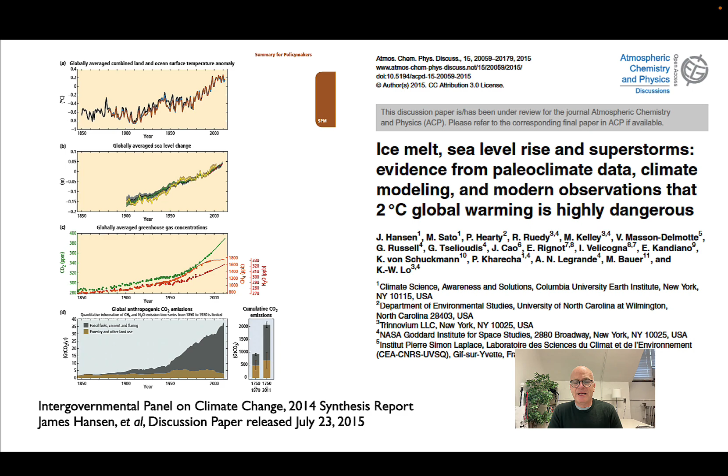This is a problem that has been noted not just by climate scientists, but increasingly by businesses and governments as well. To me, maybe the most notable moment was in the mid-2010s, when insurance industries began realizing that their business models were going to change drastically with the onset of climate change, that they were paying out more and more for these large-scale climate disasters. And in fact, there is this fight between insurance companies and energy companies over what really needs to be done and how urgent that is.

Today, I think there's broad agreement that this is a problem that needs to be addressed in all sectors, but construction is one of the largest contributors to global carbon dioxide emissions, has been for years, and therefore we have a particular responsibility, but also a particular opportunity to make a really big impact in solving this species level problem. Building operations, energizing our buildings, heating and cooling them and lighting them, takes up nearly a third of carbon emissions, 27%.

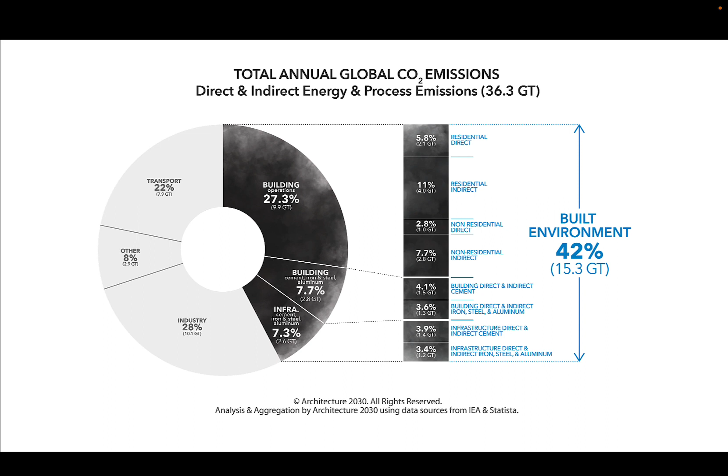And when you add the embodied energy, the embodied carbon that goes into constructing buildings from cement, iron, steel, and aluminum, but also from building the infrastructure necessary to make buildings go, what you find is that the built environment contributes about 42% of carbon dioxide emissions to the planet. And therefore, we have the biggest share of the problem, the biggest responsibility for the problem. But if we change the way that we work, we also potentially have the biggest impact on it.

The good news out of this is that we have a variety of new tools that seem like they're going to maybe give us some leverage in actually addressing these problems. About 10 years ago, in 2013, the AIA commissioned the consulting firm McKinsey to look at what technologies were likely to be the most disruptive by 2025. We're now on the doorstep of 2025, so we can look at this and assess exactly how well McKinsey did. But the idea was to think about what tools we'd have in our toolbox as architects, but also as builders, as engineers, that would change the profession, that would change or disrupt the way we build buildings.

And McKinsey thought that most importantly was probably mobile internet. I would say that some of that has certainly come true. We are more used to working on our phones or on iPads, on job sites, in remote locations than we ever have been. Whether that's been the biggest disruptor or not, though, I think is up for grabs. And it's worth looking at some of these other technologies and thinking about how they've changed the way that we practice, the way that we build.

Probably the most impactful, and one that McKinsey recognized would be one of the most impactful, was the automation of what we do, handing over a lot of the sort of drudgery work, if you like, of designing and constructing buildings to digital technologies. This idea goes back 50 or 60 years to the very, very early days of cybernetics. Doug Engelbart, who was one of the pioneering thinkers of cybernetics, picked architecture as one of the professions that would potentially benefit, or at least be changed the most, by the advent of digital technologies.

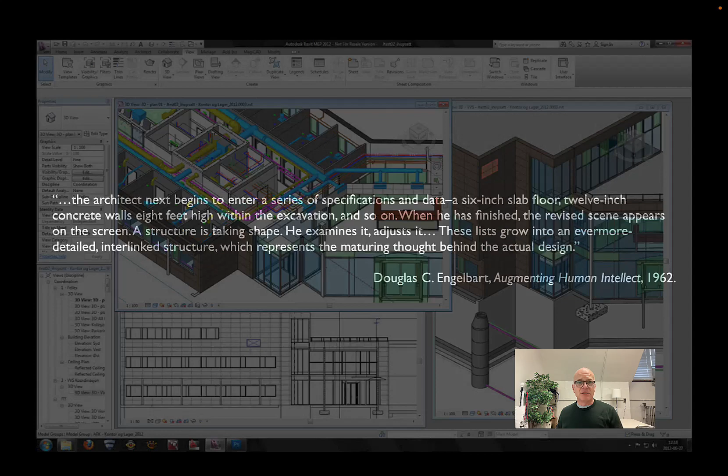And interestingly, he understands that those elements are all connected. They're all lists that can be referenced to one another to give us basically a three-dimensional spreadsheet of what we're building. And I would argue that this has come largely true, that when we work with Revit or another building information modeling technology, we're essentially working in a large spreadsheet with a graphic interface.

BIM, Autodesk, Revit, and similar programs allow us to not only see what the end result is going to be, they allow us to coordinate things like systems and structures, and in practice allow us to keep track of those. It lets us take off quantities much more easily and lets us model the building in multiple ways. So we can do cost takeoffs, but we can also model the structural behavior or look for conflicts between services, things like that.

This has been a profound change just in the last 25 years. It has eliminated an awful lot of the checking work, a lot of the clerical work that went along with practice, even as late as the 1990s.

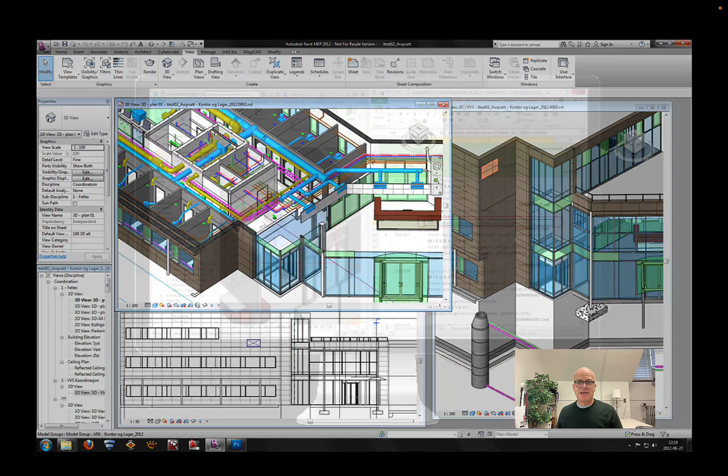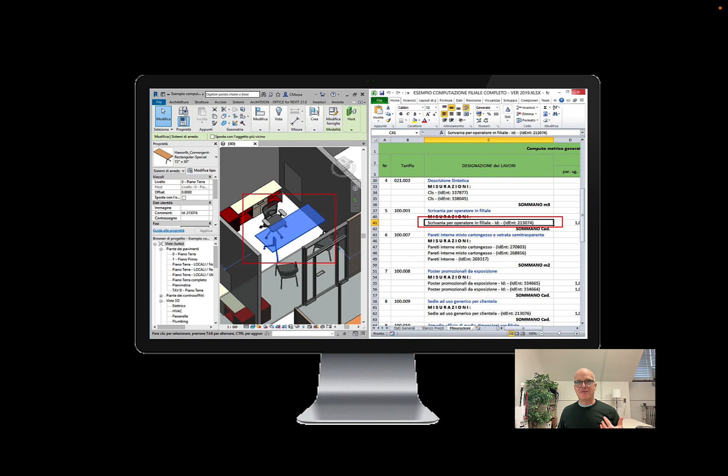And of course, this has spread to all sorts of other subdisciplines. We can select furniture, we can see if the furniture fits, we can place the order for furniture, we can get a spreadsheet of all the furniture that's going into the building, right out of the box on our desks. That has streamlined an awful lot of what we do as designers. It's given us a lot more time that in general we've tended to give right back to the clients. We've become a more efficient profession, but that efficiency largely has benefited the clients we serve rather than transforming the way that we work.

This idea has been speculated on by a lot of folks, notably Randy Deutsch, a colleague here at the University of Illinois, who in discussing the data-driven basis of design going forward in 2015 talked with a partner at LMN Architects in Seattle who foresaw architects becoming what he called data hackers, thinking about the building as a big set of code and being able to get into the code of the building and actually transform not just what it is we build, but also how we build it.

What do we mean by that? Well, I think one of the first examples you can see of this is the parametric design that went into some fairly early high-tech projects around the turn of the millennium. The so-called Gherkin, the Swiss Re Tower by Foster and Partners, built between 1999 and 2003, did this. It essentially turned the building into a set of geometric codes and allowed the designers to adjust the geometry net of the building to find the most efficient set of floor plates.

This is also used to model the building in aerodynamic simulations. You can see from the graphics that this is clearly 25-year-old digital technology, but it really was one of the first instances I can find of the code of the building, in this case the diagrid geometry that basically governed all of the structure, all of the cladding, but also all of the floor plates, the code of the building really being manipulated by designers.

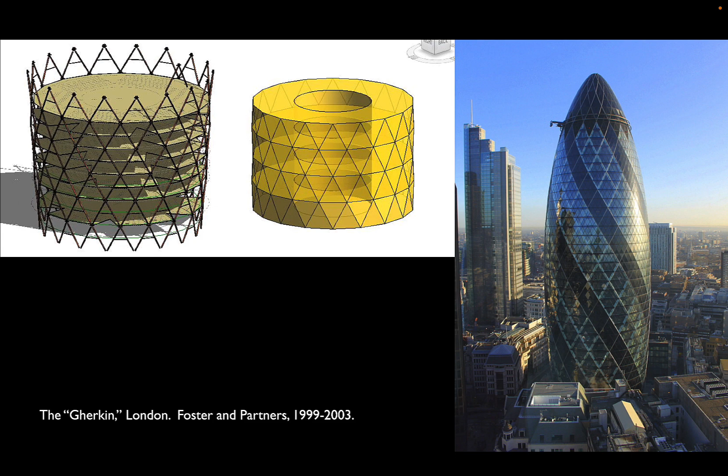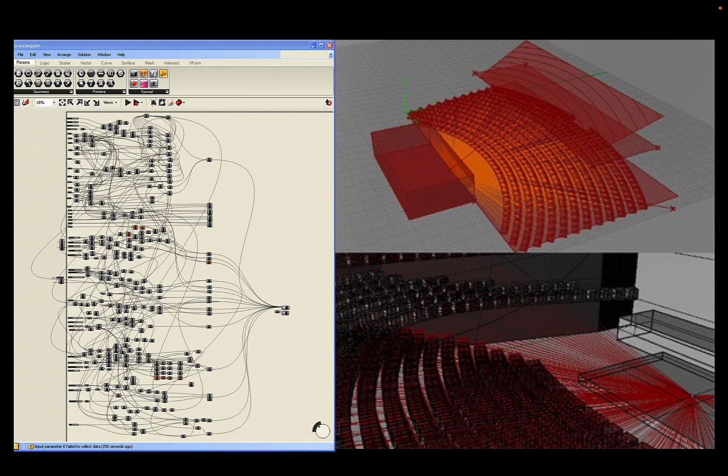Taking the building and understanding how to hack the data that goes into it to create a design tool. That ability very quickly trickled down to the point where this is a student project using Grasshopper from 10 years ago, where you can see that sight lines and acoustic lines are all being played around with by what Sam Miller would have called the DNA of the building. Shaping the space, running simulations on it and looking to see what comes back, being able to very quickly manipulate the code on the left to change the form of the auditorium on the right.

This has often been incorporated with more feedback. So Kieran Timberlake were pioneers in thinking about ways to both wire buildings for data collection and then to turn around and use that data collection to think about how to better adapt the building to its climate.

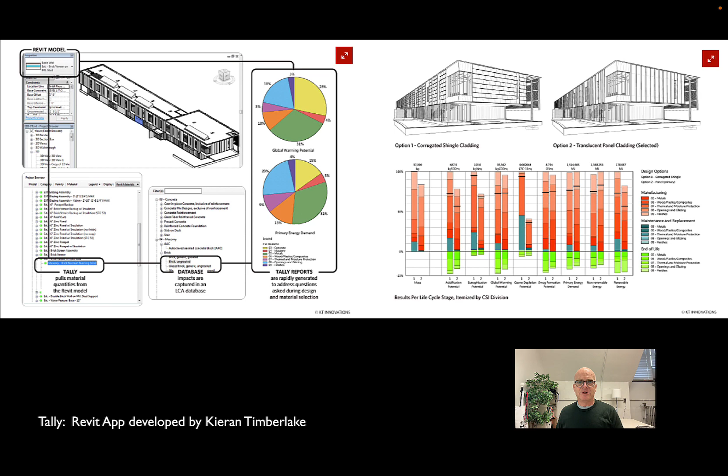So this is an app that Kieran Timberlake designed for Revit, designed to take the building's performance, to measure how warm things are, how cool things are, how air is moving through the building, and to think about how to better manipulate the cladding of the building to relate to its environment.

This can happen on a more sophisticated scale too. We get data-driven design that lets us see what the impact of solar gain is on building structures. Covetool was one of the early examples of this, and also very desktop-based computational fluid dynamics.

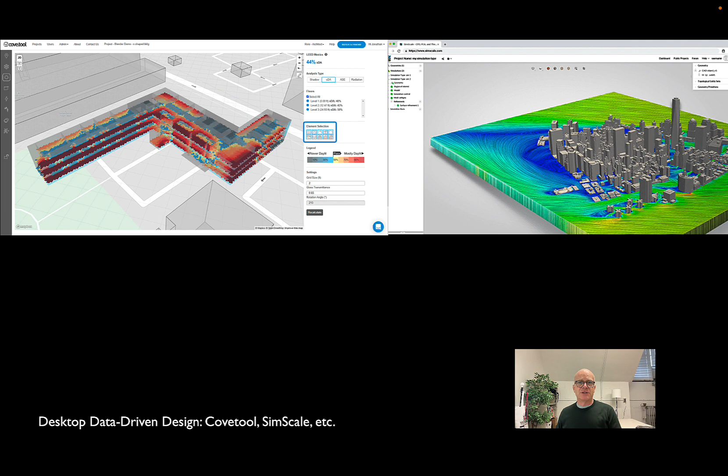One of the most complicated of the sort of 80s and 90s digital applications very quickly in the 2000s became something that was desktop-based, letting us see not only what the sun can do, but also what the prevailing winds would do, and the various effects of wind and rain on buildings we design. The fact that this has come down from million-dollar applications to desktop software has given us the opportunity to be much more agile, both in collecting data and in thinking about how that data can influence or support design decisions we make at the table.

We've also seen technologies that enable us to very quickly iterate, coming up with rapid new ideas that build on one another and gradually learn from the process. Galapagos and Grasshopper are both ways of very quickly coming up with different design scenarios. Galapagos is a so-called genetic algorithm that throws a bunch of variables at a given setup, looks at the results to see which ones perform better, and then dives deeply into those to try to figure out if there are spaces in between those examples that might be even more optimized.

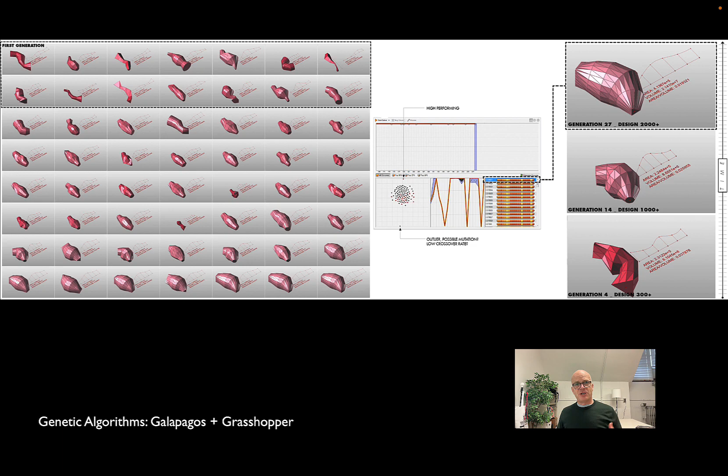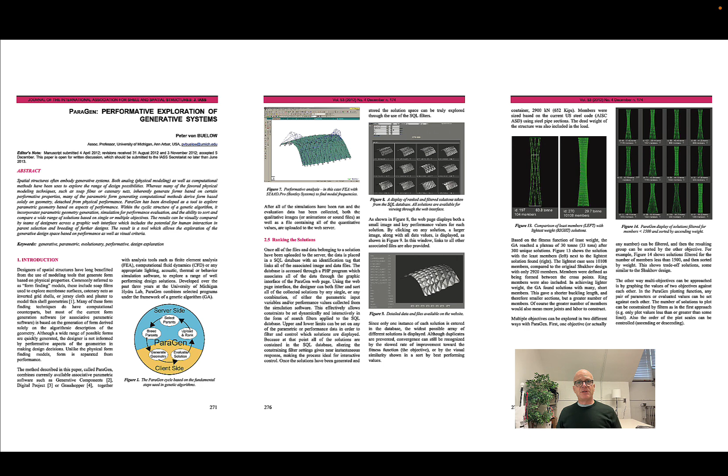This sort of genetic algorithm can be applied to structures in particular, and it's been used over the last 15 or 20 years to optimize large-scale structures, long spans and high-rises in particular. Here's a paper from a group at the University of Michigan looking at different ways to structure both long spans and tall buildings. The genetic algorithm looks at hundreds and hundreds of iterations, begins to see patterns where things get more efficient, and then offers random variations within that design space to see if there are even more efficient options. It's a way of reducing the weight of a structure for a given set of performance parameters.

In the last couple of years, we've seen the rise of artificial intelligence, which is basically taking something like Galapagos and supercharging it. IBM's Watson program was designed as a very large-scale data mining project that would rapidly go through thousands and thousands of iterations. One of the early applications was to look at real estate values in big cities and try to understand where there might be opportunities for investment. But this has also trickled down into architecture.

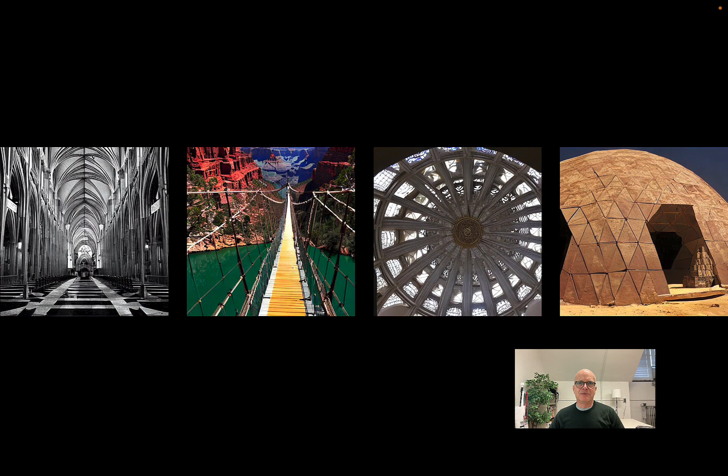We've seen this huge burst of artificial intelligence software, but also web-based AI that lets us visualize, and maybe at some point will let us actually design things like structures, handing over a lot of the intelligent labor we do as architects to digital technologies. Thus far, I'd argue that the role of AI has been sort of gimmicky. What we've seen more than anything else is the production of images, which are impressive but relatively simple compared with the integrative work we tend to do as designers.

One way to think about this is to consider what we do that isn't replicable by artificial intelligence. About 10 years ago, NPR did a study of how jobs might be affected by AI, which was then still on the horizon. They had a little website where you could plug in what you did for a living and see whether you were likely to get put out of work by a computer. Interestingly, if you put in architectural and civil drafters—people who prepare drawings but aren't necessarily licensed architects or engineers—the bot thought you had about a 52% chance of your work being automated.

When we look at technologies like Revit and the automation that already goes on within that software, that seems pretty conservative, actually. There's a lot of work we used to do by hand that now gets done not only digitally, but also with artificial intelligence, rudimentary though it might be.

Interestingly, though, when Planet Money changed the parameters a little, and you put in that you were actually an architect instead of just a draftsperson, you had almost no chance of being replaced by a machine. That's because artificial intelligence is very good with data-heavy problems, like solving the most efficient way to lay out ducts in a building while avoiding conflicts. But it's not so good at running a meeting or interviewing clients to find out what they really need, or coming up with clever solutions that aren't part of the optimization space that something like Galapagos looks at. We also negotiate. We have to think not only about the cost or efficiency of things, but the value of things—something we'll return to at the end of this lecture.

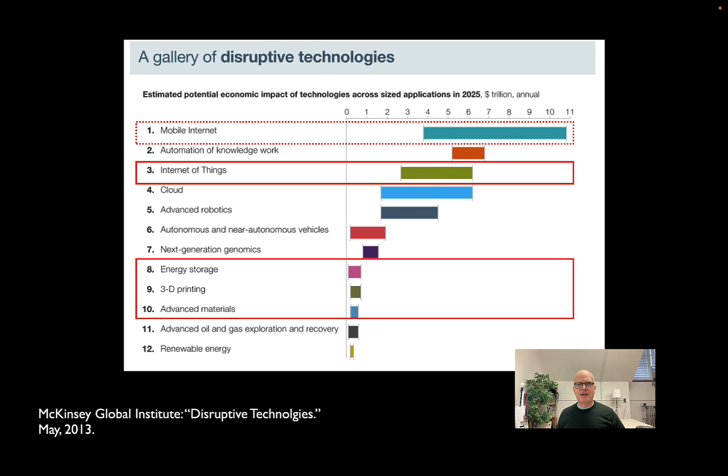Other tools that McKinsey was looking at that I think have really exceeded the potential they saw are something called the Internet of Things, which we'll talk about in a minute, and then a lot of questions about energy and materials. So energy storage, 3D printing, and advances in materials, McKinsey thought were relatively unimportant, and I would argue those have actually been much more important than you would have thought 10 years ago.

McKinsey thought autonomous vehicles would be relatively important. I think that is a bridge that we haven't really yet crossed. Those still seem to be quite problematic in their applications.

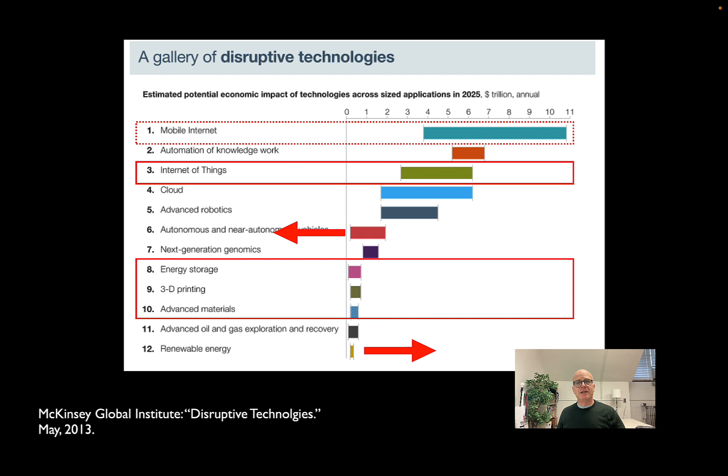And finally, McKinsey did not think renewable energy would be important, and yet I would argue that maybe has been one of the most significant technologies that's come in—maybe not disrupted so much the practice of architecture on the ground, but it's certainly changed the way we think about energy and energy consumption.

One example of this is the state of Iowa, which we don't think of as a particularly technologically advanced state, but in fact, over the last 10 years, Iowa has been one of the leaders in renewable energy, in large part because it has access to so much potential wind power. You can see from the statistics that by 2021, the state was generating more than half of its energy from wind power. And in 2023, they had their first day where 100% of the state's energy was generated by wind.

This, I think, maybe isn't a disruptive technology in that it doesn't change the way designers think at the desk. But if you think about the impact of this on the 27% or so of carbon emissions that are based on running buildings, this really is significant. The more we can look to renewable energy to power our buildings, the more readily we'll be able to address some of those CO2 problems.

The use of renewable energy requires a couple things. It requires a great amount of space, so we're seeing, for instance, the use of rooftop solar come into play. In a lot of cases, you can lease the solar panels and sell the energy to a local utility. And we're seeing a lot of work on storage—you want to turn the lights on not just when it's windy out, but also when it's not windy or when the sun's not shining. So how you take that generated electricity and store it is a really big issue, and potentially something we as architects have to look at going forward: space for fairly large batteries to power our buildings when the wind and sun aren't out.